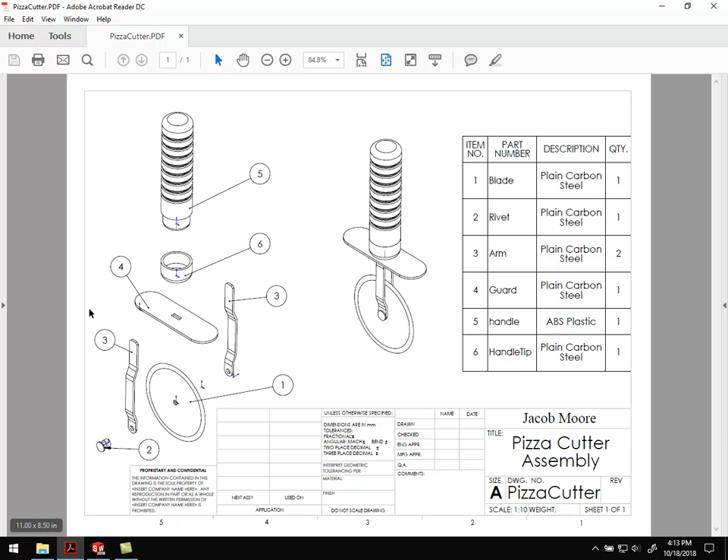So this is part 1, that's the blade, plain carbon steel, etc. And these balloons we're going to add as well to link it to the bill of materials.

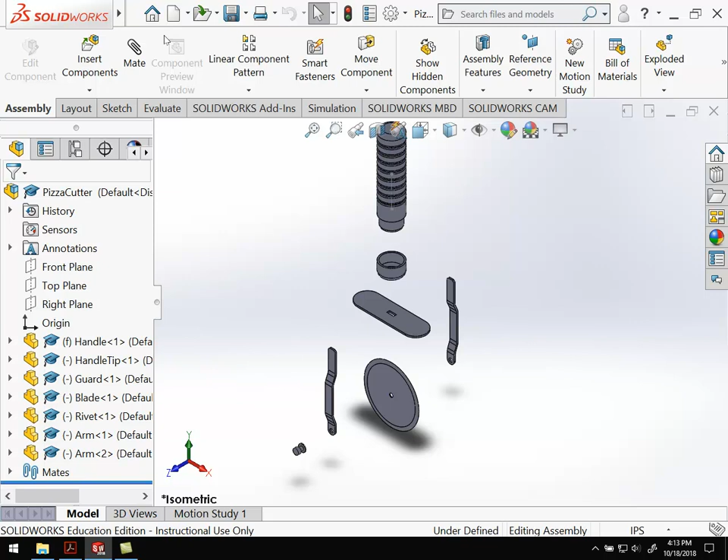Going over to SolidWorks, just like with our part drawings, we can use those to start the drawings. We're going to use the assembly to start this drawing. Go ahead and open up your assembly. Should have something that looks like this. Go ahead and open that, and then do File, Make Drawing from Assembly.

We're going to stick with the same formatting, so A size paper, ANSI formatting, and hit OK. In this we're going to go ahead and insert eventually both of these two.

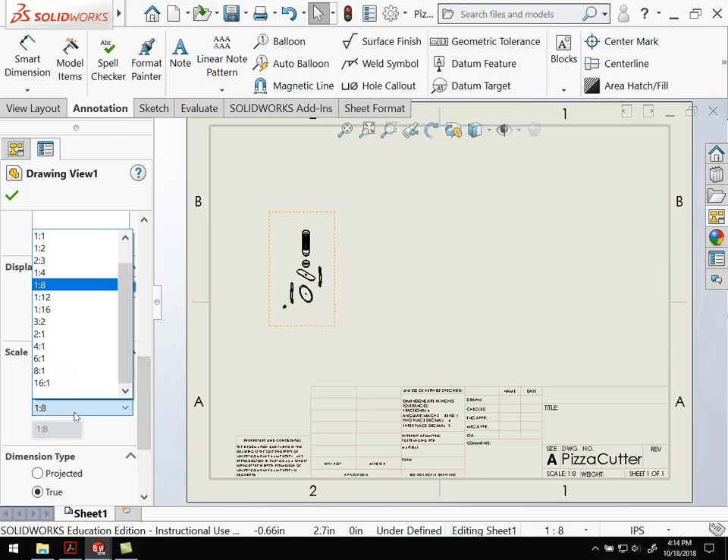So I'm going to start with the exploded isometric. And that is tiny, so let's go ahead and mess with the scale on that one as well. Use custom scale, let's try 1 to 2. That's a little too big, so let's go like 1 to 3. Now I don't have that one, so let's make it a user defined, just type in 1 to 3. There we go, that's about the right size.

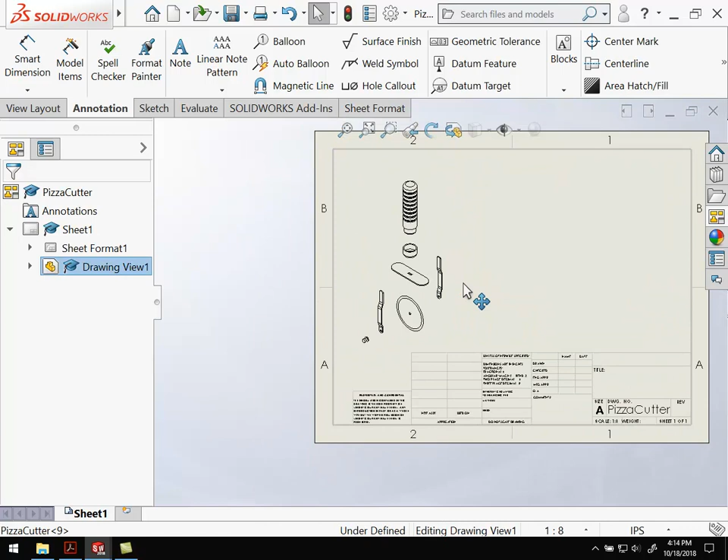Alright, so that's our exploded view. Let's go ahead and add another model view. We're going to do the pizza cutter. No, just double click on it. Alright, there we go.

It's inserting another exploded view. We want to undo that, so uncheck this box here. There we go, now it's not exploded.

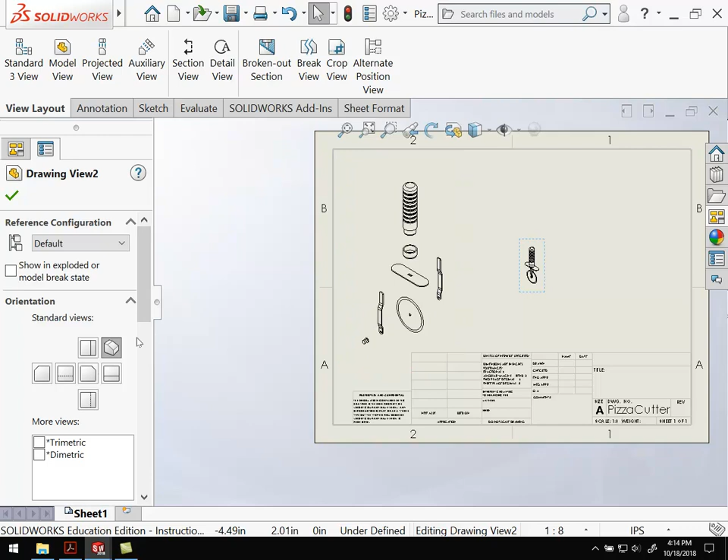All right, so that also, we're going to want to mess with the scale. Let's go ahead and use custom scale. Let's do the same, to be consistent, let's do the user defined and do 1 to 3 just like we did before. Alright, there we go. So that's our assembled drawing, our exploded view.

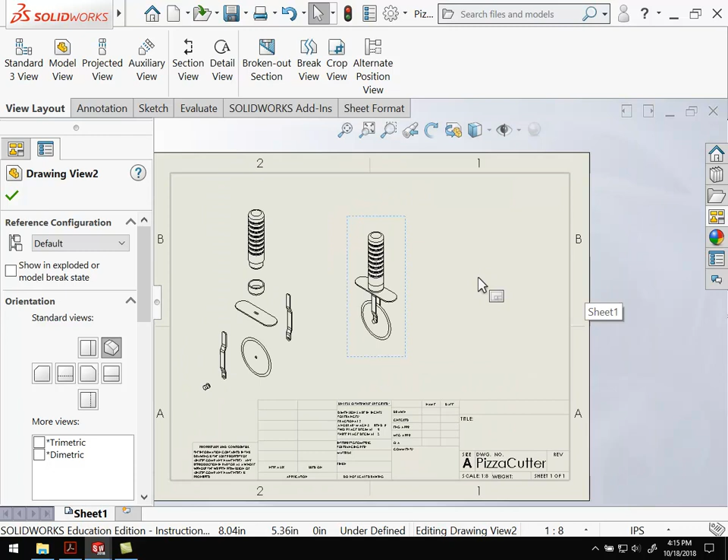And we're going to add bill of materials as well. But before I do that, I need to go ahead and add the balloons. So my bill of materials has part numbers to work on. That's under annotation, and we can actually do this manually or we can auto balloon. Auto balloon will just assign numbers to the parts, and I believe it works in the order in which we added them to our assembly.

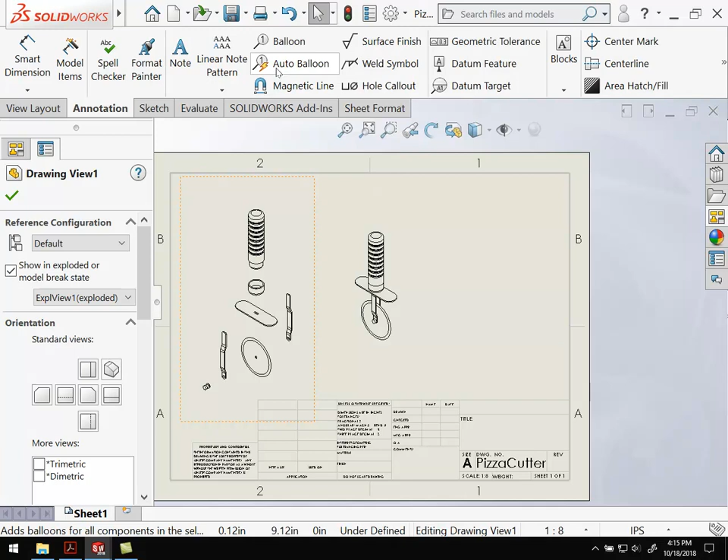So if I do auto balloon, there we go. Alright, so it added balloons, it kind of labeled all these parts. The formatting is terrible, but the numbers are just fine. So let's go ahead and we'll drag them all into place. So that's part 1.

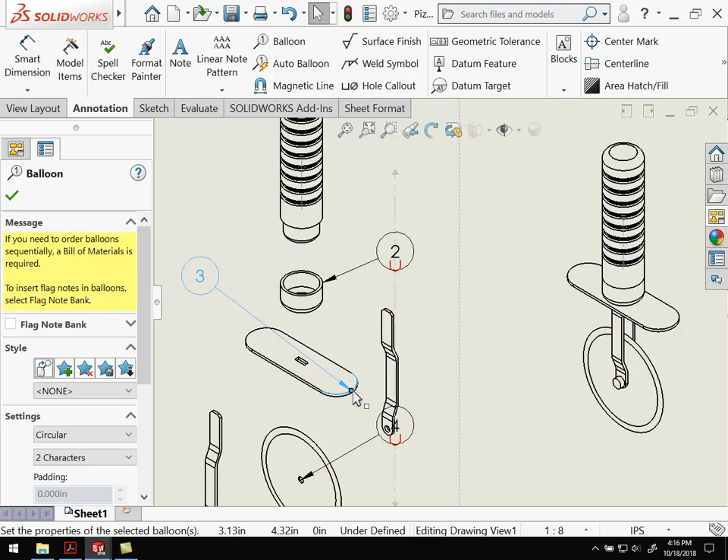Let's drag. Oh, there we go. There's part 2. Oh, for some reason these are all lined up. Let's move part 3 over here, so it's the guard. And at this point, you're just making it pretty, so try to make sure nothing overlaps.

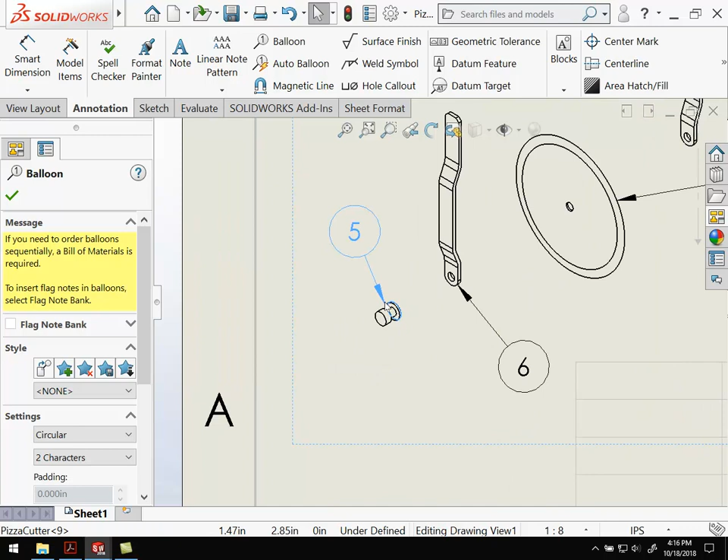And you can take the ends of these arrows and kind of put them so the arrows aren't going over too much of this. Alright, so there's part 6, there's part 5. Make sure we got all inside the drawing, don't want stuff on the outside there. Oops, if you go too far and you're not actually on the part, it gives you a question mark.

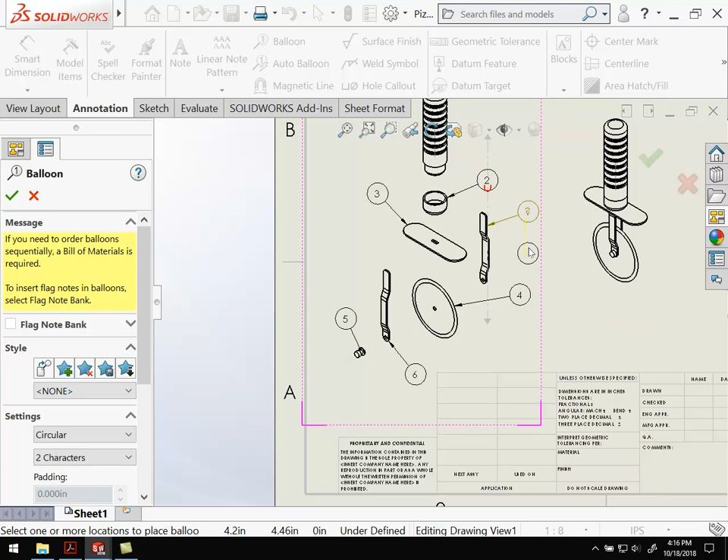And one of my arms is not labeled, so I'm going to go ahead and balloon that part. If I just go ahead and hit balloon, this is question mark. Alright, I guess it's not quite on the shape. There we go, part 6. You gotta make sure that arrow actually touches the shape. Yeah, it's a little finicky.

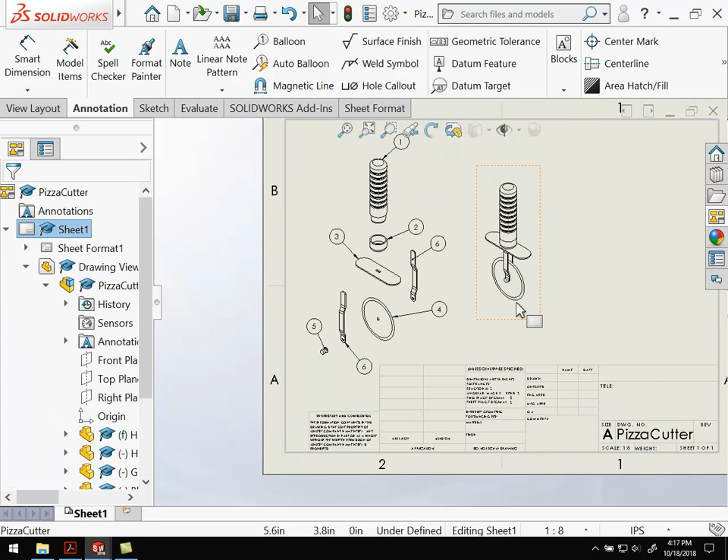Alright, so now I've got 2 of the part number 6, and 1 of everything else, and those are all balloons. So now let's go ahead and add our bill of materials over here on the side. I'll give myself a little more room.

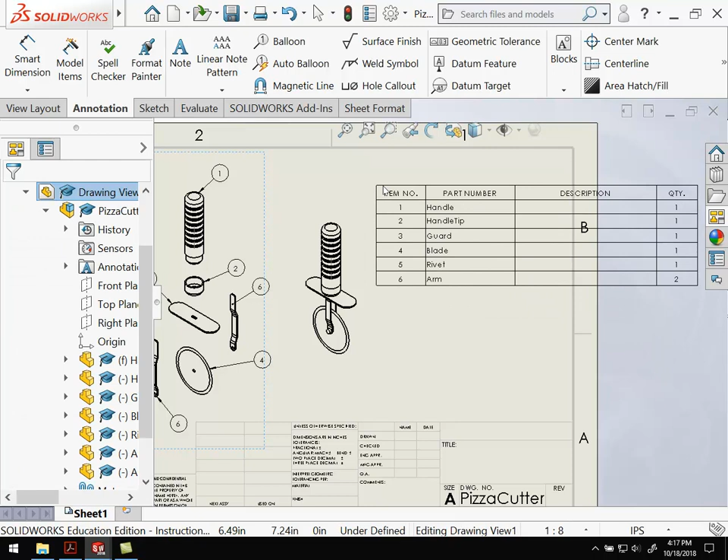For this, I'm going to go up to Insert, and it's a type of table, the bill of materials. So bill of materials, and I got to select a view. Oh, I'm selecting here, make sure that you have your exploded view. Go Insert, Tables, Bill of Materials, hit OK. There we go. All right, so go ahead, click that in there, and we are going to make this tall and skinny rather than kind of short and wide. All right, and there we go.

So some of this stuff is you're going to want to keep. So item number, this needs to correspond with your balloons over here. This is part number, and that's not really the right name for this, so if we double click this, we can label this part name. That's fine. All right, rather than description, I'm going to do material.

And quantity, I'll keep that because I got 2 of the arms, 1 of everything else. So we could potentially link the material into the part, specify the material in each part, but we're not going to do that. We're just going to manually enter it here. Our handle is made of ABS plastic, and everything else is actually plain carbon steel, so we're just going to manually type that in at this point.

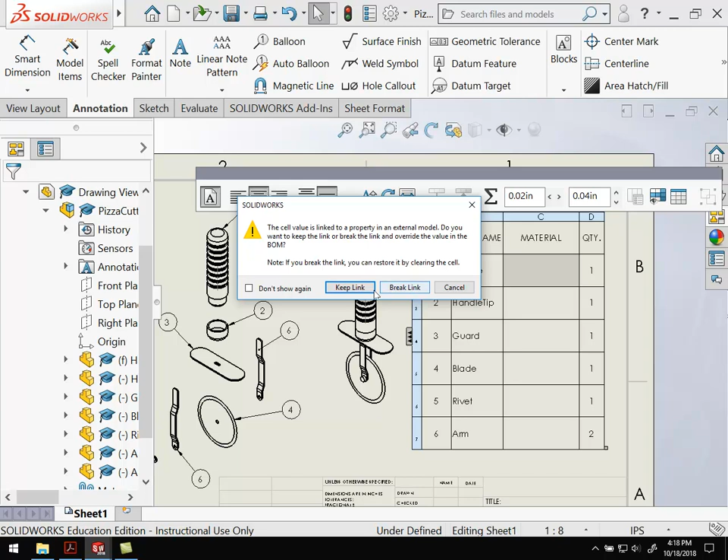So if I kind of double click, it's going to break. We're going to want to break the link, so we're not relating this to material properties that are specified in parts. We didn't do that. And I can just put ABS plastic.

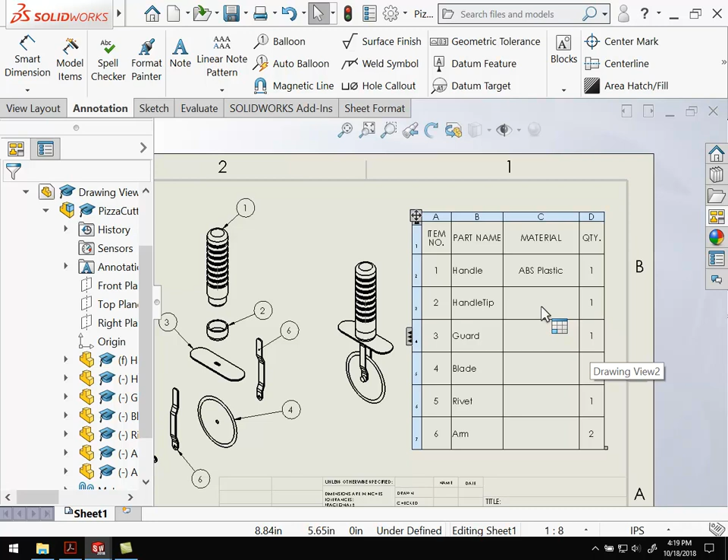All right, we're going to do the same thing for the other parts, except all the other parts are going to be plain carbon steel. So I don't have to type this over and over again, Control C.

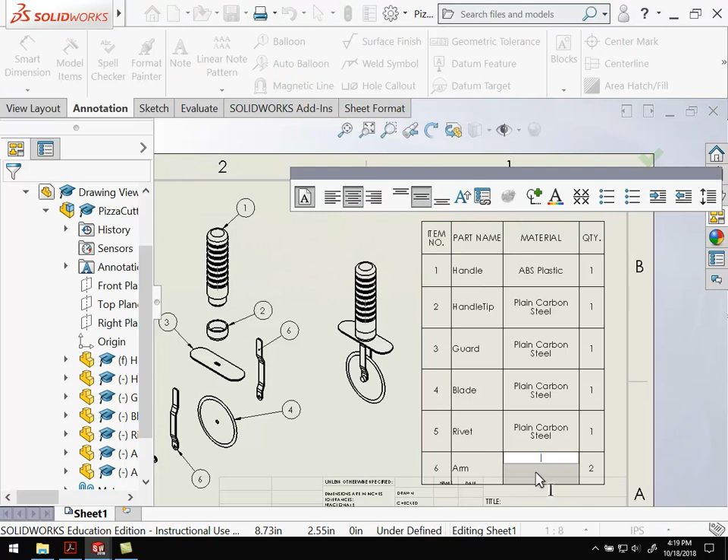All right, so let's go ahead. We were overlapping, let's escape out of that. We're overlapping a little bit with our menu. If we move this up, bring it down a little bit, and just kind of generally get it in the right spot. All right, so that looks pretty good.

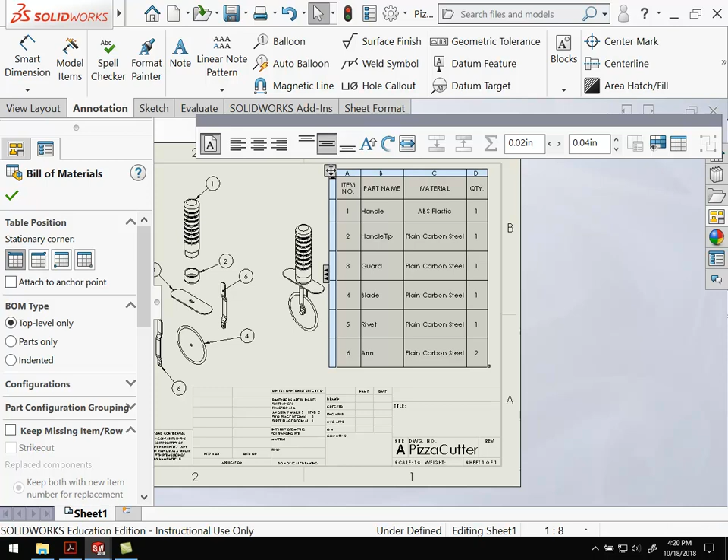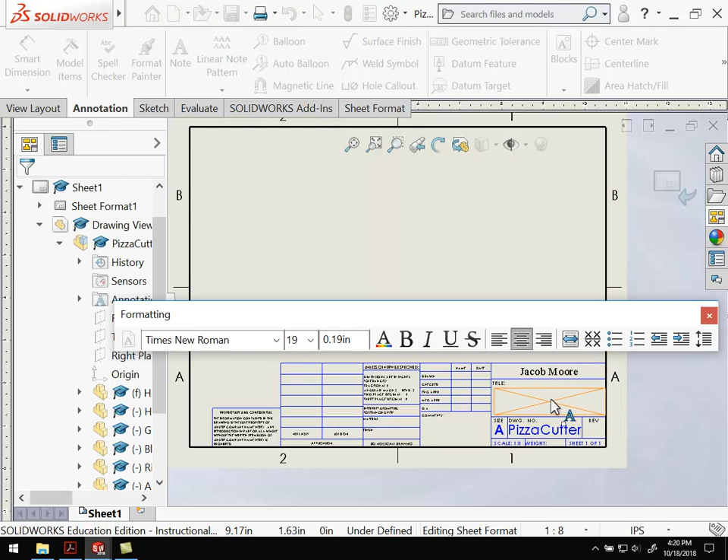All right, so last piece with all this, we've got our balloons, we've got our views. I'm going to change the sheet formatting. So right click, edit sheet format, add my name, add the name of the part. So this is the pizza cutter assembly.

And right click up here again, edit sheet to get our part to show back up. And that's all we have. So that is our drawing for the assembly here.